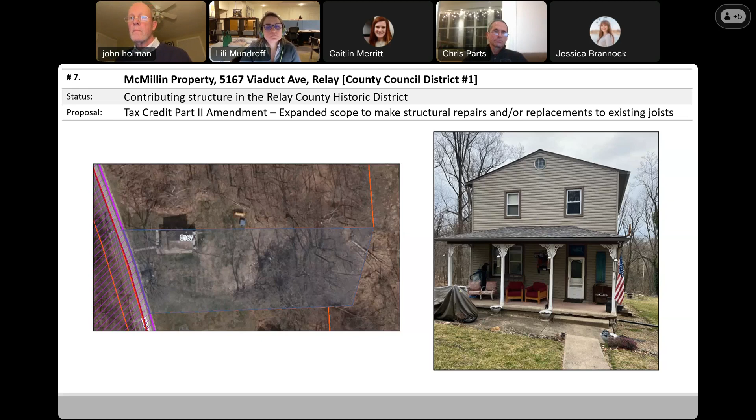This is the McMillin property at 5167 Viaduct Avenue in Relay, County Council District Number 1. This is a contributing resource within the Relay County Historic District, and the applicant is seeking a tax credit Part 2 amendment to expand the scope of work to make structural repairs and or replacements to the existing joists, citing Baltimore County Historic Design Guidelines, facade materials, pages 1 through 12, County Code sections 11-2-201 and 32-7-405.

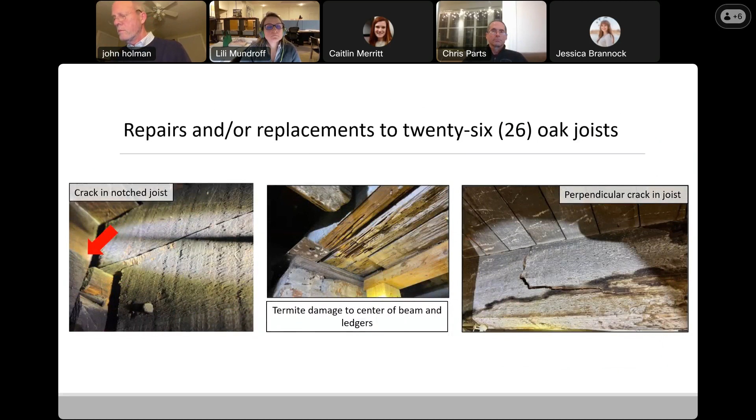Good, thank you. Commission, any objections to that being a consent item? No. Not hearing any. May I have approval for that consent item? Is there a motion to approve, and second? Second. And can we do a roll call vote for that, Jessica?

Yes, can we have Phoebe, please? Yes. Chris Weston, yes. Wendy, just raise your hand, Wendy, if you... Go ahead, Wendy, you're unmuted. Wendy, can you hear me?

Is that the consent agenda item? We're approving those. Can you say yes or raise your hand? Well, let's move on to the next. Can we have Ed, please? Ed, are you unmuted?

It looks like he got kicked out of the meeting. I don't see him on the list. Do we still have a quorum? Hold on, yeah, Tom just joined us. Yeah, we have next man up, kind of thing. Okay, all right, so we'll come back for Ed.

Jamie, please. Yes. Lily, yes. Tom. Present. Oh, we're voting on the consent agenda. Understood, and I wasn't here to hear it, so I'm voting abstain, or present. I'm that's here, but I was not here to hear the testimony. That's just fine. So recorded, Tom, thank you. It is not part of the quorum.

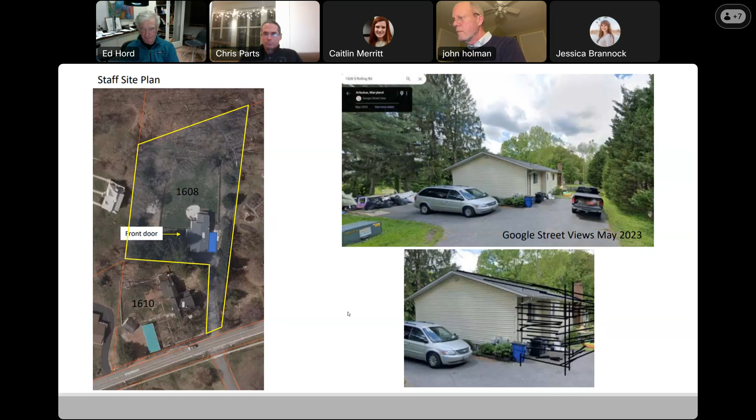The addition will be situated atop a cement block foundation, clad in vinyl siding, and have an asphalt shingle roof, all to match the existing materials of the main dwelling. Information from the contractor via email indicates the rear roof structure will be tied into the main roof's ridgeline, extending the rear slope to create a uniform roof. Copies of these emails were included in the meeting materials.

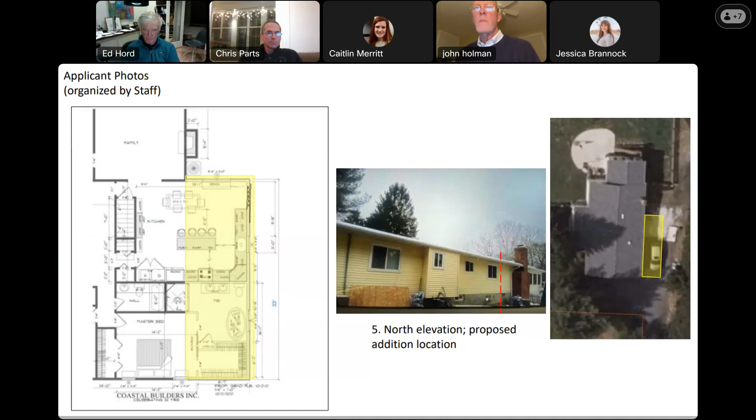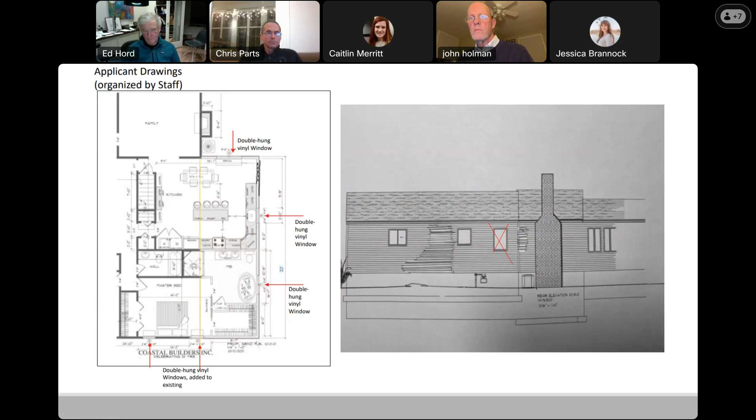There will be 2 windows on the north elevation and 1 window on the west elevation of the addition. Additionally, 2 windows will be added on the east elevation of the existing dwelling where none currently exist. They will be double hung vinyl to match those on the existing dwelling. No elevations of the east elevation were submitted that show the proposed addition from that view.

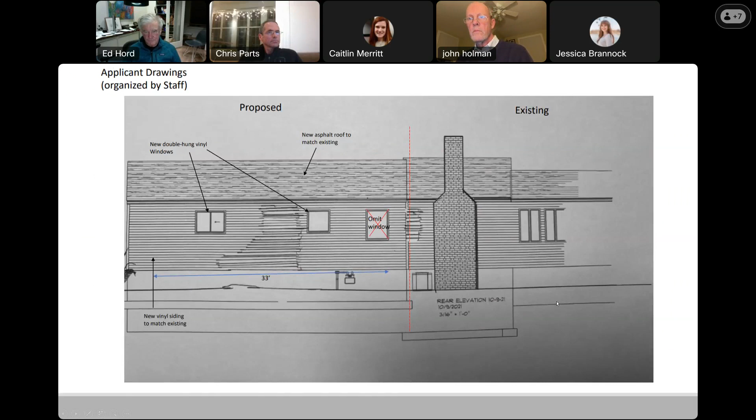Staff's recommendation is to vote to issue a certificate of appropriateness as proposed, citing Baltimore County Design Guidelines, Additions and Infill, pages 1 through 7, County Code Section 32-7-405.

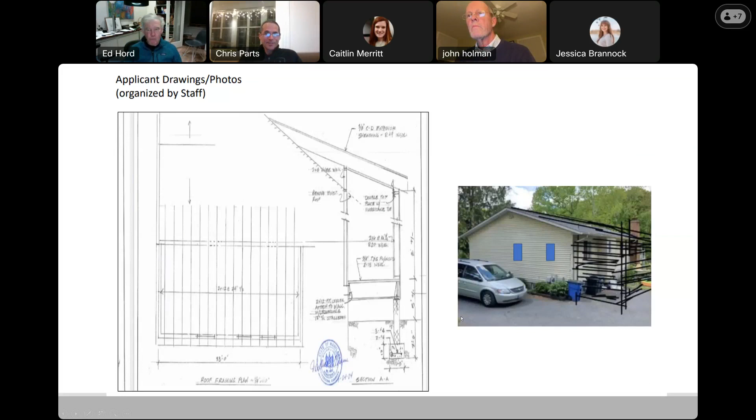Thank you, Jessica. Commissioners, any comments, additions, corrections, thoughts? I think it seems very hidden and looks like a reasonable addition. I would follow the staff comments. So should we take that as a motion? Yes, I would move that we align with the staff comments and move to support appropriateness.

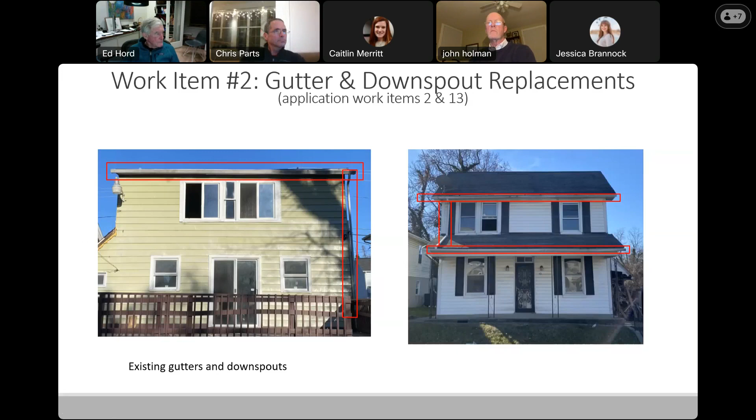Work item 2, gutter and downspout replacements. Currently, there are 5-inch K-style aluminum gutters on the front porch and rear elevation. The applicant proposes to remove existing gutters and downspouts and replace them with new K-style aluminum gutters and new 2 by 3-inch downspouts at the same locations.

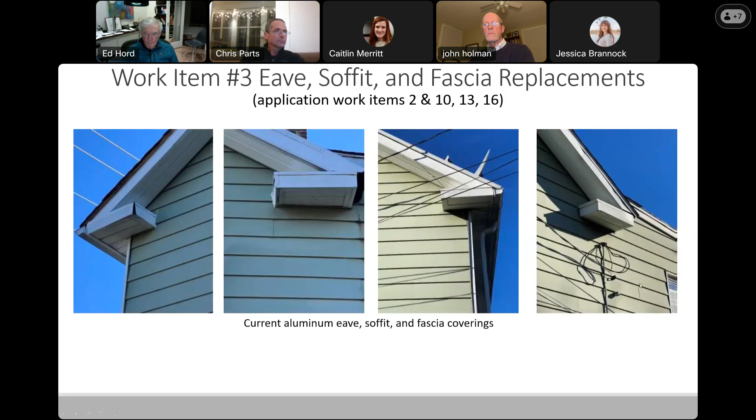Work item number 3, eave, soffit, and fascia replacements. The existing eave, soffits, and fascia on the dwelling are covered in aluminum, are beyond their usable life, allowing water penetration. The applicant proposes to replace existing coverings, repair eaves, soffits, and fascia as needed, and replace coverings with an in-kind material at the same locations on the entire dwelling.

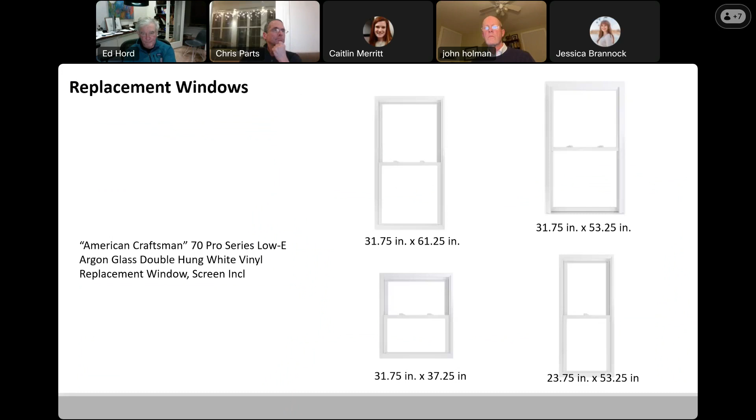Work item number 4, windows. The dwelling has 23 existing windows that are previous vinyl replacements of various sizes. There are 1/1 double vinyl hung windows with aluminum casing and vinyl shutters on the front. The applicant is proposing to make in-kind replacements to the existing windows. The replacements will be 1/1 vinyl double hung windows throughout the dwelling with new aluminum casing, reinstalling existing shutters on the front. In addition, there are several alterations to existing window openings and the creation of new window openings, which are proposed because they interfered with interior alterations.

The following are alterations to the existing window openings. On the front elevation, the existing paired window on the second story will be removed and replaced with a single window to align vertically with the window on the first floor. The wall will be reframed and covered in the new siding.

The applicant notes that several of the same type of dwellings on the street have single windows on the front elevation. Our design guidelines state that changing the location, covering up, or changing the dimensions of a window opening, or adding new windows, is not appropriate, especially on the front elevation, as it disturbs the structure's rhythm and undermines the historic integrity. In this situation, the window alteration still respects the historic character of the house.

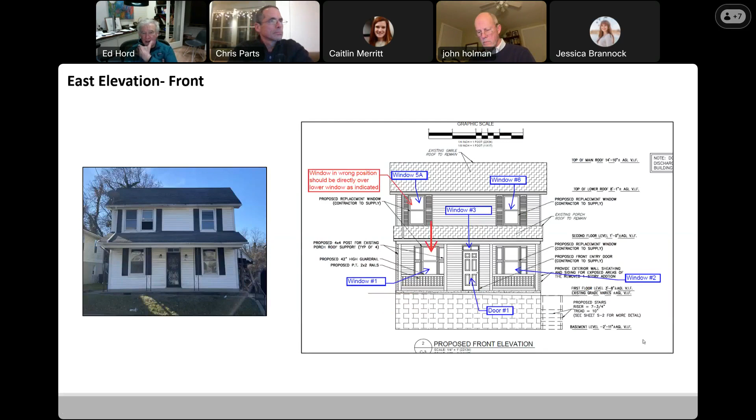On the north elevation, the existing second-story window measures 28 by 42 inches. The applicant proposes to remove the window and reframe the wall to accommodate planned interior renovations. Siding will match the rest of the exterior wall.

Shed addition, second floor: current windows measure 27 by 42 inches, including a grouping of 3 1/1 windows measuring 27 by 42 inches. These windows interfere with planned interior renovations. The proposal is to remove the existing windows and reframe the exterior wall to accommodate 2 new windows in similar but new locations, measuring 24 by 54 inches and 32 by 54 inches.

On the rear elevation, second story, there is a cluster of 1/1 stationary windows flanked by 2 vinyl sliding windows centered on the elevation. On the first story, there are 2 windows measuring 32 by 38 inches. These window placements interfere with planned interior renovations.

The applicant proposes to remove the windows and reframe the exterior wall, rebuild the newly exposed exterior wall, and install new sheathing, vapor barrier, and siding. New window openings in new locations are proposed on the rear, upper, and lower stories, installing 4 new windows measuring 32 by 54 inches.

On the south elevation, second story of the shed addition, there is a grouping of 3 windows measuring 27 by 42 inches, which interfere with planned interior renovations. The applicant proposes to remove the windows and reframe the wall to accommodate a single 32 by 54 inch window. Siding will match the rest of the exterior.

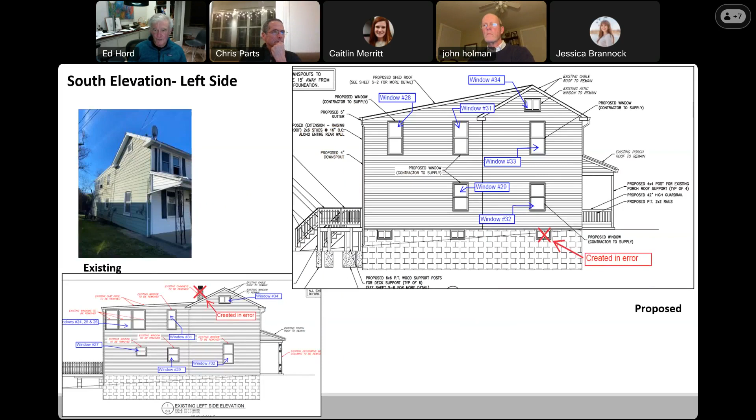For work item number 5, exterior doors. The existing front entry is a single leaf 6-panel steel door measuring 32 by 80 inches with a vinyl sliding transom window and a steel storm door.

The applicant proposes to remove the current storm door entry and transom window, rebuild the door and transom frame to current building codes and standards, replace the transom window with a to-be-built custom transom window with frosted glass, and install a new steel 6-panel door of the same dimensions as the existing.

For alterations to the existing door openings: at the north elevation side door under the side porch addition, proposed for demolition is a single leaf non-functioning door with closed off transom opening. The applicant proposes to remove the door and transom and reframe the opening to accommodate a window, centered on the wall, measuring 32 by 62 inches.

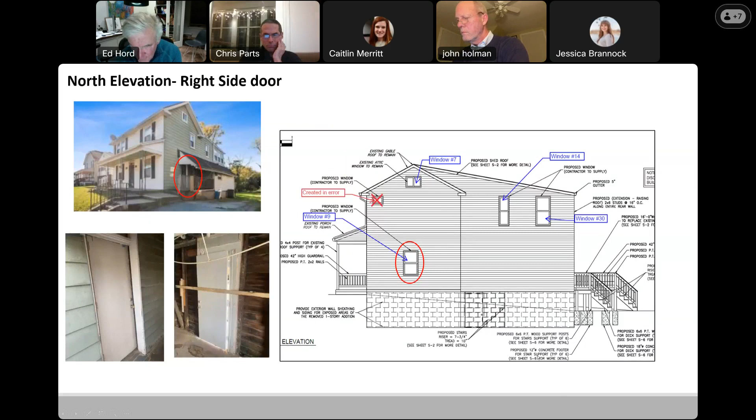On the rear elevation, there is a centered sliding glass door. The applicant proposes to remove the sliding door, rebuild the newly exposed exterior wall framing to current building codes and standards, and install new sheathing, vapor barrier, and siding.

For the new door openings on the rear elevation, after removal of the existing sliding door, the applicant proposes the creation of 2 new door openings on either end of the building wall. 2 36-inch wide single leaf glazed and paneled steel doors will be installed.

Our design guidelines allow enclosing, enlarging, or adding openings at the rear or other portions of the house that are not visible from the street, which may be appropriate if the proposal respects the historic character of the house.

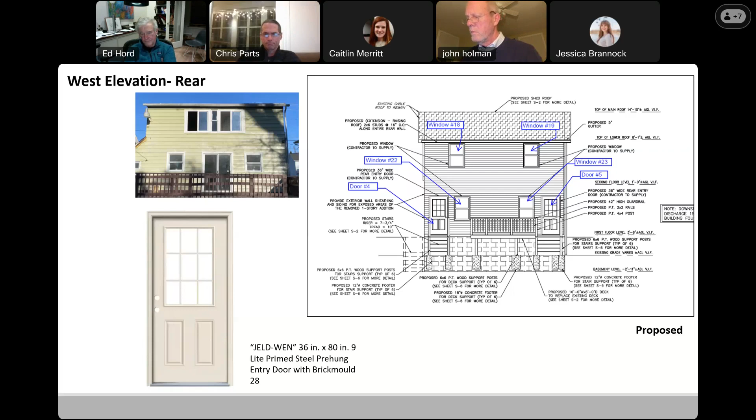For work item number 6, the front porch. The existing front porch has 4 decorative metal posts supporting its shed roof. The applicant proposes to remove existing posts and replace with pressure-treated 4x4 lumber with vinyl post surrounds, and to install new vinyl balusters in accordance with current building codes and standards. In addition, the existing 3-tab shingle roof will be replaced in kind with a new 3-tab asphalt roof.

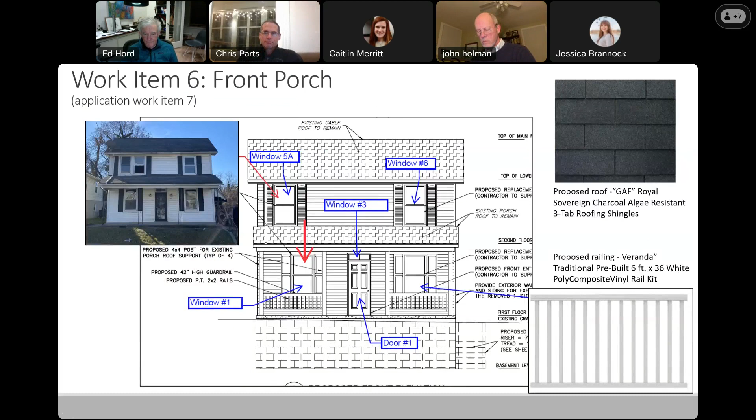Work item number 7, front steps and walkway. The existing front concrete steps and concrete walkway wrap around the front porch and south foundation wall. The walkway is in poor shape and sinking below grade. The front steps are in a poor location, leaving little room for the driveway. The applicant proposes to demolish the front steps and replace with new 3-foot wide concrete steps with a 10-inch tread and 7.75-inch risers, in accordance with current building codes and standards, in a new location, moving them over slightly.

The existing metal handrail will remain and will be used as the right side handrail to the new stairs. In addition, the applicant proposed to demolish an 11-foot concrete walkway section on the left side of the front elevation and a 40-foot section along the side elevation, regrade exposed sections with topsoil and proper slope, and landscape.

Work item number 8, side addition and porch. Staff notes that from the Sanborn Fire Insurance maps, this side addition appears to have been constructed in 1929, around the same time as the rear shed addition. The one-story, one-bay side addition is clad in vinyl siding and porch with a shed asphalt shingled roof. The applicant notes that the entire structure sits on a sinking block foundation and is pulled away from the main house. The enclosed addition was poorly built, appears to have been built with substandard materials, and is full of wood rot.

The applicant proposes to demolish the existing single-story addition, covered porch, and shed roof, repair and repoint any newly re-exposed original random stone foundation on the north side of the main structure, build new stairs leading to the cellar and cover with a steel door, rebuild newly exposed exterior wall framing, and install new sheathing, vapor barrier, and siding. The existing side door will be converted to a window opening.

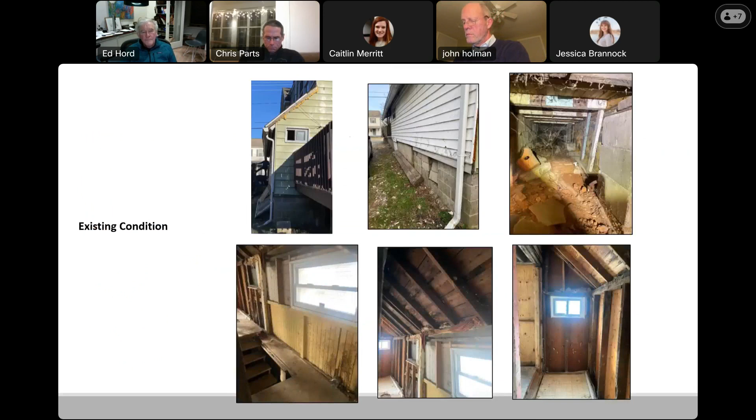For work item number 9, rear addition roof. The rear shed roof addition was constructed in 1929. The applicant notes that the shed roof on the rear addition appears to have been laid at 2 separate time periods, with a newer roof laid over the first. Neither roof was properly affixed to the gabled roof structure, nor properly supported.

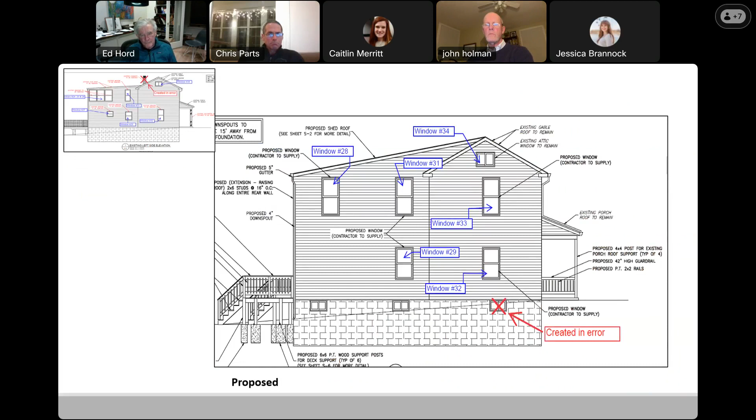Additionally, the floor joists on the second level of the addition were not properly sistered or supported to the main structure. The applicant proposes to rebuild the roof structure in accordance with current building codes and standards, raising it to be level with the main roof's gable. The old roofing materials will be removed, and new decking, underlayment, and coverings will be installed to match the rest of the house roof.

Work item number 10, main roof and chimney. The existing roofing on the main house is a 3-tab shingle. The applicant proposes to replace the existing material in kind with a new 3-tab asphalt roof. In addition, new decking and underlayment will be installed. There are 2 brick interior end chimneys that are no longer functioning and in a deteriorated state. The applicant proposed to remove both chimneys.

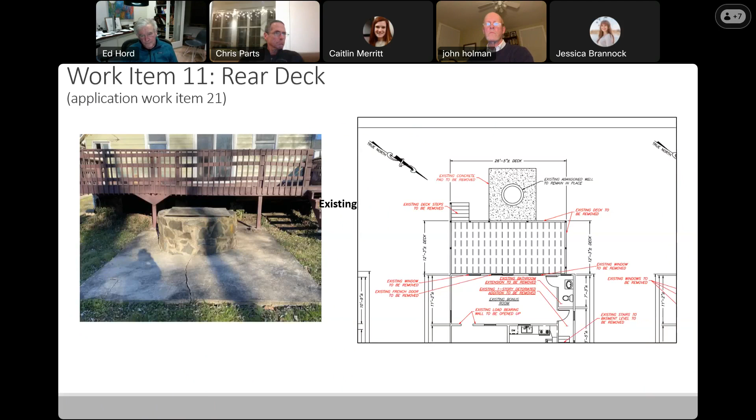For work item number 11, the rear deck. The rear wood deck currently sits on an old concrete deck or porch. The concrete deck is old and crumbling, and the wood supports are rotting. The wood deck is severely warped, showing signs of improper supporting. The applicant proposes to remove the existing deck and concrete porch and construct a new 8 by 16 foot pressure-treated wood deck to current building codes and standards, with a wood rear landing and stairs.

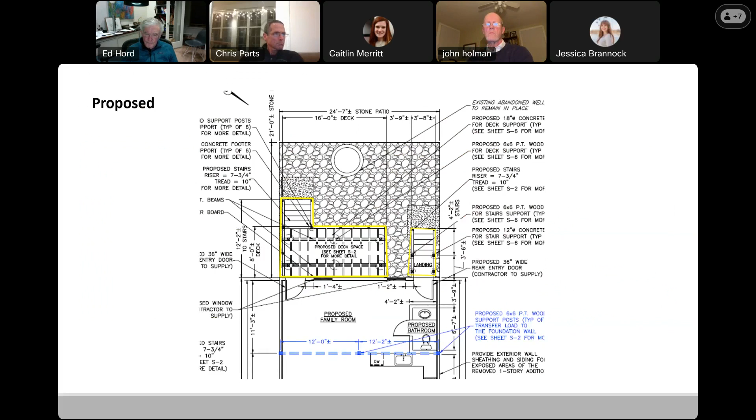Finally, work item 12, the patio. There is a small concrete patio around the well, and it is cracked.

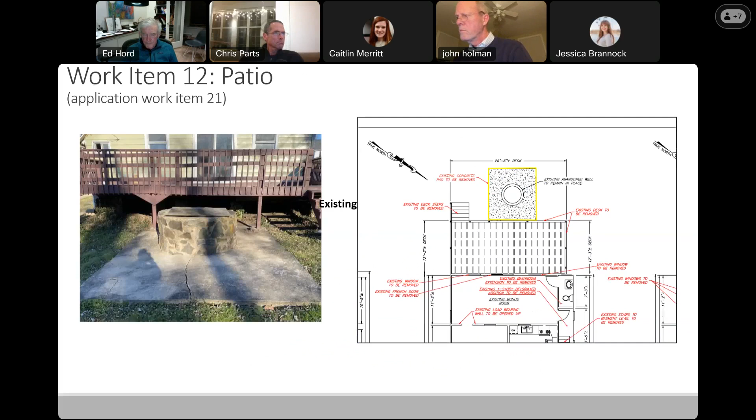The applicant proposes to construct a new 24 by 21 foot patio around the well to proper grade and slope. The builder would like to use 4 by 4 pressure treated wood as the patio border and attempt to repurpose the bricks from the demolished chimneys as infill. If this is not approved or not possible, the builder will use a 3/8 inch pea gravel aggregate.

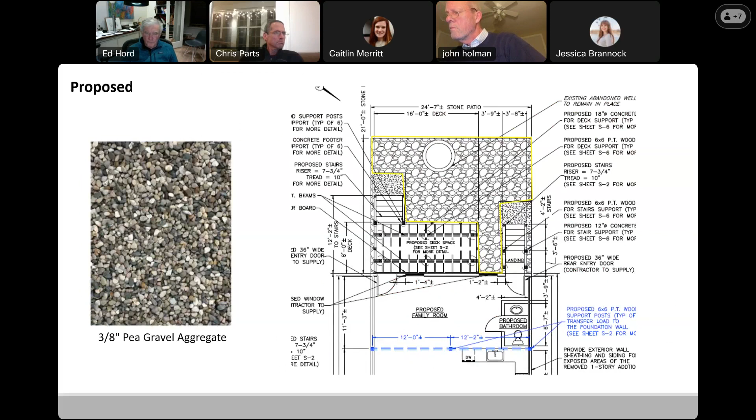Staff's recommendation is to vote to issue a certificate of appropriateness with the condition that the HardiePlank siding have a smooth texture with no faux wood graining, citing Baltimore County Historic Design Guidelines, chapters roofs, pages 1 through 13, porches and steps, pages 1 through 6, facade materials, pages 1 through 12, windows and doors, pages 1 through 8, County Code Section 32-7-405.

Thank you, Jessica. I appreciate it. It's a lot to cover on this particular house. It changes the nature of the house a little bit, and I welcome staff comments or thoughts on it.

Anything, commissioners? I think it's a great change from last time. I think it looks like a much more thorough package and a good understanding of the issues.

And we do have the property owner and project manager on with us. Thank you for that reminder, Jessica. Would the property owner like to address anything before we begin our discussion? Mr. Albatar and Mr. Sloan, I have you unmuted.

I want to thank everybody for their time and giving me a second go at this. I wish I had the time before the first meeting to get it together the way everything was presented this time, but I literally got the plans back from the engineer two days after the last meeting, so I apologize for that. I did have a little speech to say, but I think I'd probably just be better off keeping my mouth shut. Good advice for everybody, right?

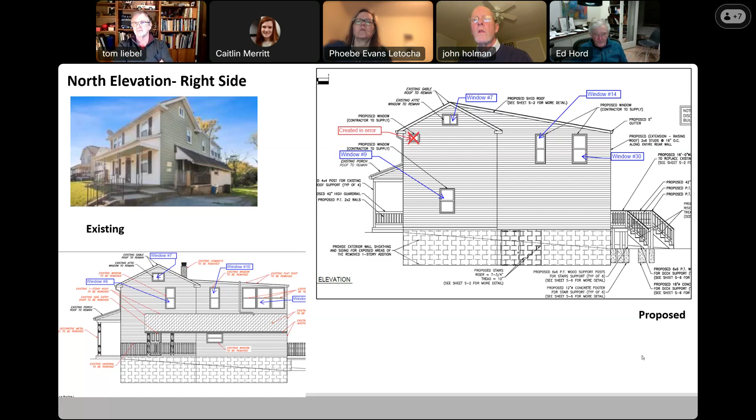Tom, I'm not quite clear—so you're suggesting that during the process they document what they find underneath as part of what we can add to the history of the house.

Yeah, there's all this conjecture about what was here, what wasn't here. You're going to see where windows have been cut out, patched in, and moved around—clearly this house has been heavily manipulated over time. You can start to trace that history through what's left over underneath the clearly new siding there. You'd probably see it through the framing exposed on the inside as well.

Does that, for any of you, alter your thoughts on approval or how we proceed with this, or is it just added information for the historical record?

I do have a question though with what this raises, and maybe staff can answer this. As I understand, when there are different layers of roof and you're going in for tax credits at the state level, if you end up uncovering an older layer, it was my understanding that you'd have to put back that layer if you uncover it. So how does that work with the siding, in terms of taking out the siding and discovering what's underneath, for a landmark project?

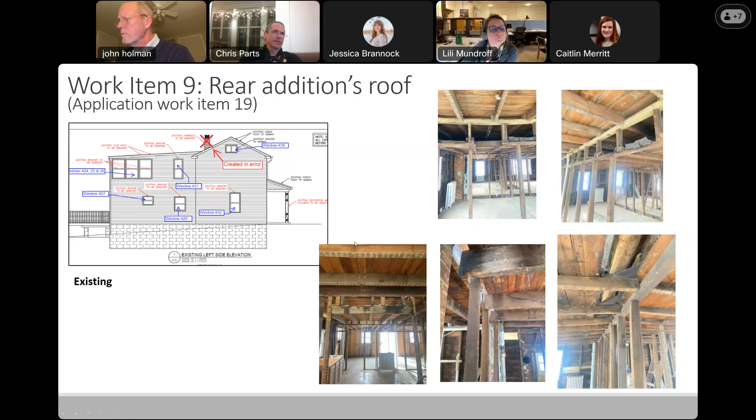I guess, John, just a question. As I'm looking at this and trying to understand, both the addition and the main part of the house are on the same plane, if I'm reading that correctly. So if something like that were to be done with the siding, there would have to be a termination of some sort between the old and the start of the vinyl, if that's the case.

I suppose there would have to be something. I guess it's a little deceptive because what I'm seeing in the elevations is a vertical line shown there. I don't know if there's a setback there. In your plans, it doesn't look like there is one. I guess you're calling it a plane, but yes, it is all one smooth side.

However, we would not have any problems making a division line there, of wood or some other material, to separate the 1870 home from the addition. We could do that easily, a vertical trim piece there.

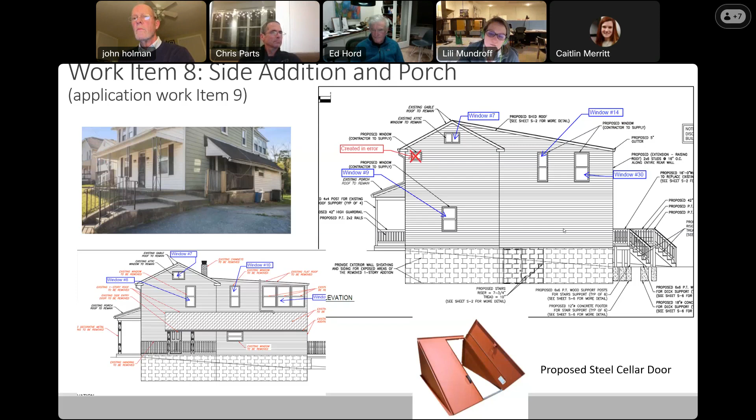Commissioners, also with the removal of the chimneys, does that have any context for anybody, that this is an older home that originally had chimneys? Can we make some provisions on the staff's recommendations as far as allowing the chimney to remain?

Of course we can, we can do whatever we want. That sounds pretty broad, but we could alter the vote to issue a certificate of appropriateness to include capping and keeping the chimneys, and extending the HardiePlank smooth finish, not textured, to the 1870s portion of the building.

I'll say that I don't think any chimney is visible from the road. I'm looking at this on Google Earth right now, and I don't know if it would be a good idea to switch siding. I do like the idea of adding the vertical line to show this is the old and this is an addition, but to use two different types of siding on the building, I think is not going to come off.

But it may be reasonable for the backside. So you're not switching on the visible sides, but you could switch to vinyl on the rear.

So if I understood Chris's thought, he's just suggesting that we do the vertical divide just to show that one was an addition, but it could be the same siding on both pieces. Is that what I heard, Chris?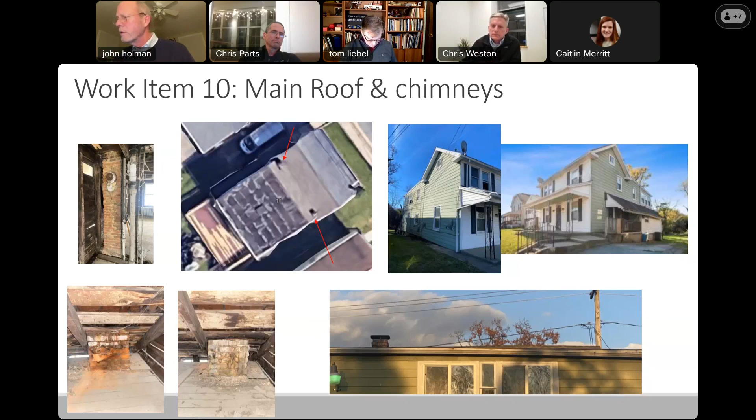And if I may amend that motion, just to put an exclamation point that the texture should be smooth of the siding, if I understood the staff recommendation correctly.

Do you accept that amendment, Chris? If it's HardiePlank, but aren't we also saying that we're approving vinyl? Yes, so if it's HardiePlank, do the smooth texture, but we are allowing vinyl. Okay, good, so I retract that thought.

Is there a second? I'll second, thank you Tom. Can you restate the motion so everybody understands? Yeah, so vote to issue a certificate of appropriateness with the condition that there be a vertical differentiation of the vinyl siding to show the two stages of the house being built.

So it's going to be with the condition that it can be vinyl siding, because they gave us two different types, and a vertical trim piece. Did I capture that, Chris? Yep, good. And so Tom is second, and we are ready for a roll call vote. All right, can I have Phoebe, please?

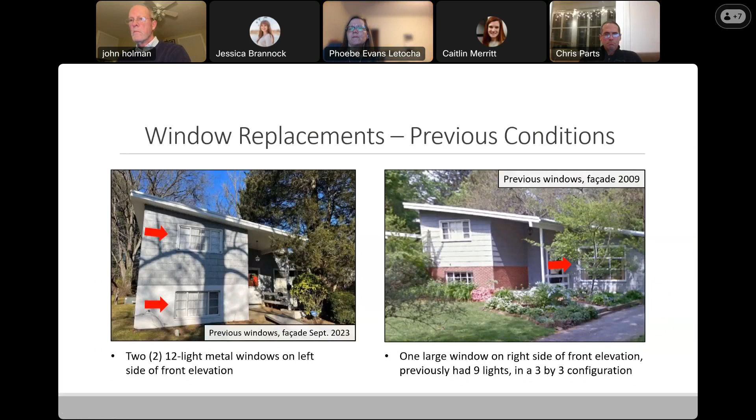The 2 replacement windows on the left of the front elevation will consist of 2 68 by 36 3/4 inch aluminum clad wood windows with 6 lights, flanked by 2 16 3/4 by 36 1/4 aluminum clad windows with 3 lights, to recreate the original 12-light windows. The windows will be painted white to match the original color. The previous 9-light window on the right side of the front elevation will be returned to with a 109.25 inch by 73.25 inch aluminum clad wood window with 9 lights, painted white.

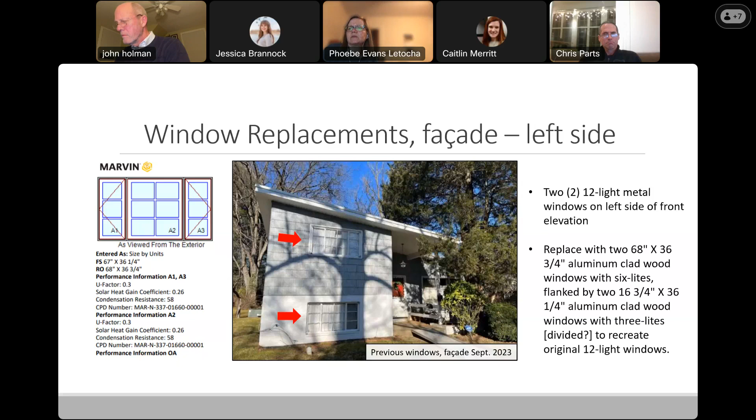Staff's recommendation is to vote to issue a certificate of appropriateness as proposed, citing Baltimore County Historic Design Guidelines, Windows and Doors, pages 1 through 8, County Code Section 32-7-405.

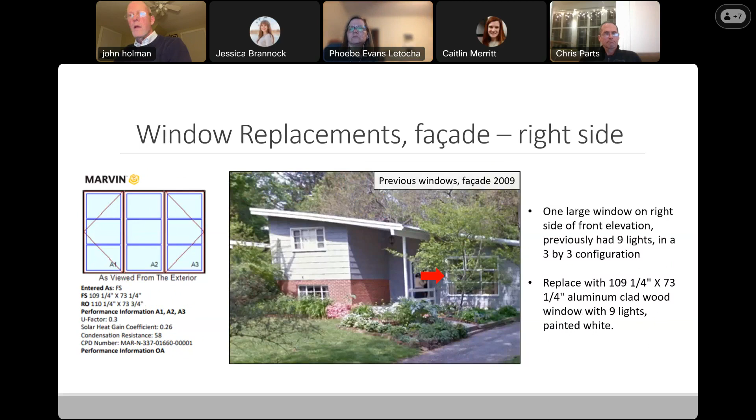Thank you for shedding light on that, Jessica. We appreciate it. Commissioners, any thoughts or comments? This is a repeat where they brought it back to us with a little better information. I think it's a great improvement. I do have the property owner, Mr. Dominic Smith, on.

If you'd like to give any comments, Mr. Smith. Nothing really, other than I got with an installer, Marvin Windows, with the custom nature - it was kind of hard to find just a stock window company that could do it. Pella said that architecturally they couldn't quite match the original, which was based off of what my next door neighbor has. Andersen was somewhere in the middle. But I went with this company that does Marvin Windows, and they have worked a lot with historical commissions all over the state. I had them draw up the proposal to satisfy all the requirements you mentioned with the Muntin profile and everything else. So I hope everything's correct this time around.

Thank you for that attention to detail. Ed, was that in the form of a motion? Yeah, I'll make a motion to vote to issue a certificate of appropriateness as proposed, citing Baltimore County Historic Guidelines, Windows and Doors 1 through 8, County Code Section 32-7-405. Is there a second for that? Second. Thank you.